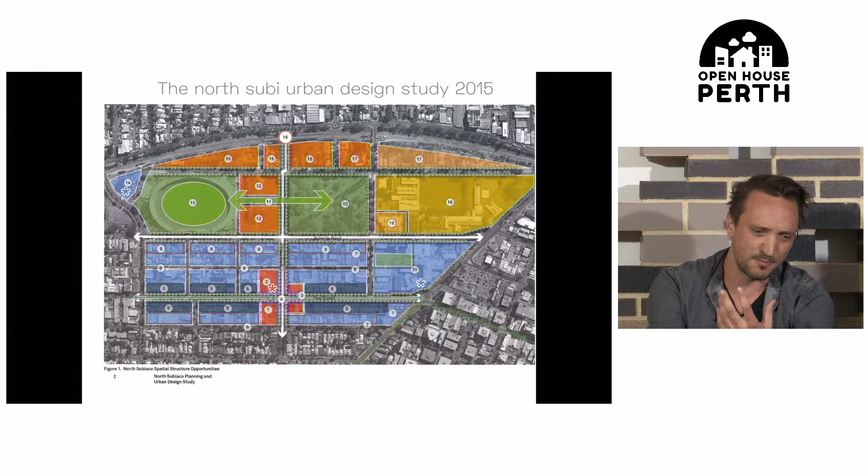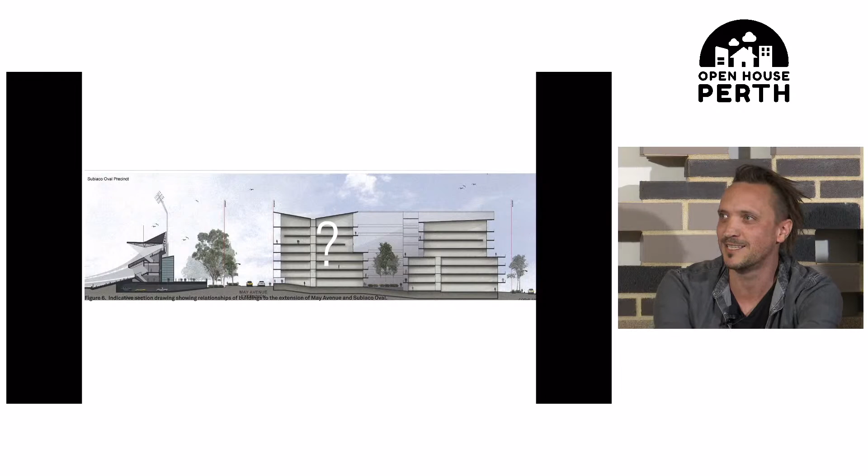At the time there'd been this North Subi urban design study done, which picked up a broader precinct, but it had some pretty scary sections in it, which didn't look that exciting - well, actually just looked really scary. When we went through all the feedback from this urban design study, there were 3 words which kept coming out, and that was sport, open space, and mixed use.

So we thought, well, let's retain a sports use, let's link and expand the open space, let's actually create a mixed use heart for the precinct. We knew that once PMH got vacated and developed, you can't just have acres and acres of multi-res. You need to actually have some sort of heart or hub to it.

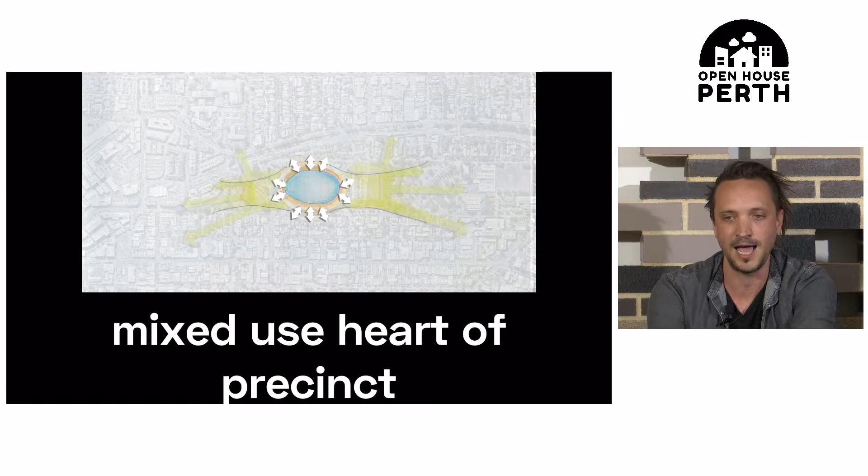And we really wanted to reinforce the transit connections between the 2 train stations, which were actually really quite close to one another. So we essentially presented to the City of Subiaco that today we have an oval, tomorrow you won't have an oval - it'll be demolished, and we want to replace it with a large water body. At about this time in the presentation, they all sort of looked somewhat bewildered and amused.

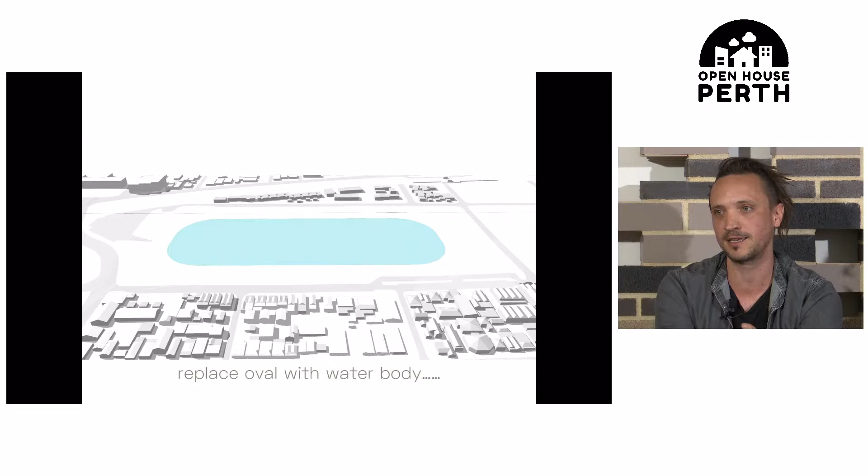But for a sense of scale, that lagoon or lake is essentially the 2 lakes of Hyde Park combined. So if you imagine this place, it's like Hyde Park, essentially - the scale of what we're talking about.

And then we wanted to sort of wrap this whole water body in parklands. But importantly, we wanted to elevate that parkland so that you actually create a hill for Subi. And we wanted to then activate the ground floor along the west, along the north, and along the south.

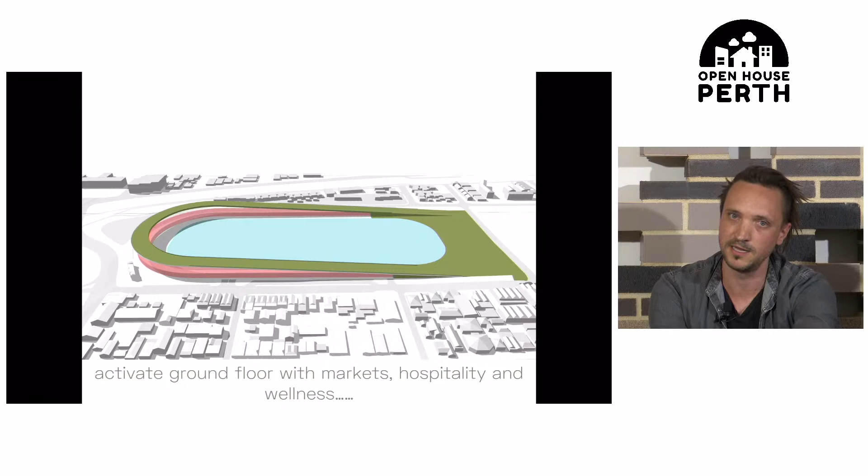Bring back markets, which would be permanent markets. We wanted to get hospitality, which could work both sides - lagoon side and street side - and introduce wellness in there as well. And then insert 220 dual aspect apartments, which would overlook the lagoon.

We would then create a link in a new public space, which would be a market square, which would help link West Leederville Station with Market Square Park in Subi and just reinforce that pedestrian link.

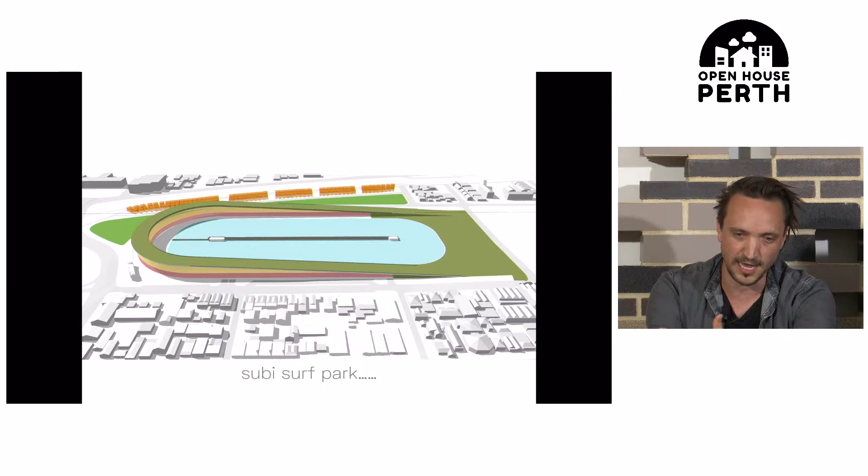And then, following the tradition of Subi and terrace housing along the railway, introduce essentially a series of attached housing along there to provide some diversity. And then you would have Subi Surf Park as a facility installed within that lagoon. So here's an image of it, 2015.

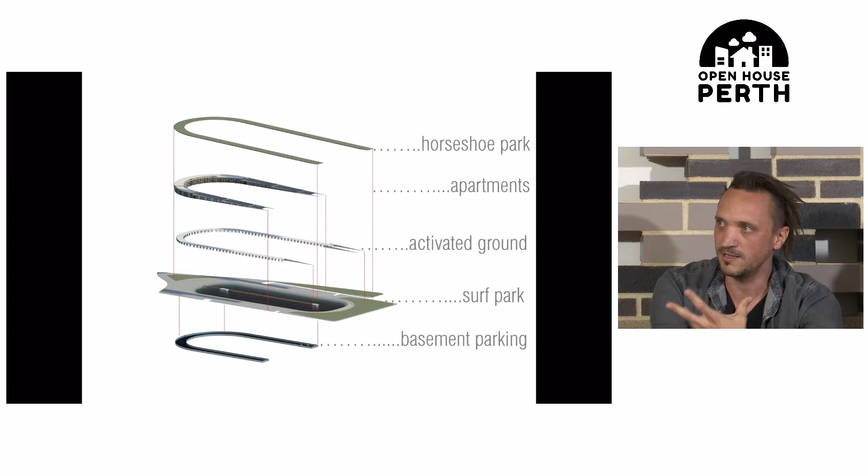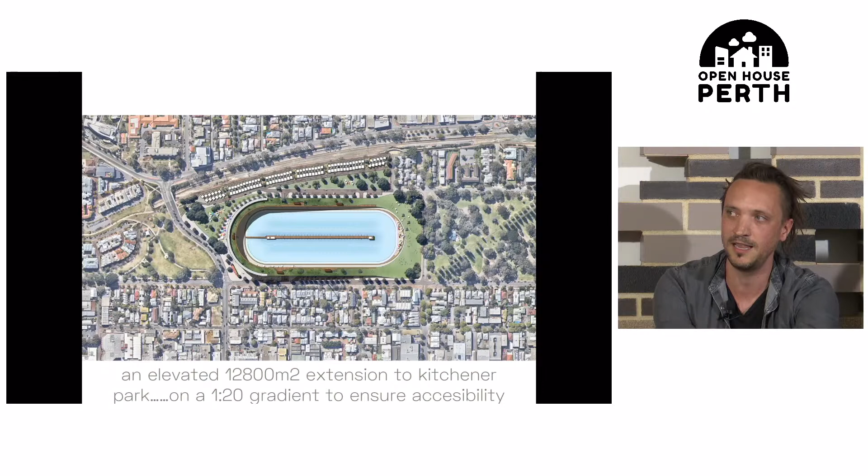So within an exploded axo, you can see the basement parking, surf park, activated grounds, apartments, and then this horseshoe park. We imagine this horseshoe park as an elevated, almost 13,000 square metre extension to Kitchener Park, for both passive and active recreation - a running track, a picnic spot, a really intriguing space that we thought we could also program with a narrative around the Hall of Fame of all the people who played at Subi.

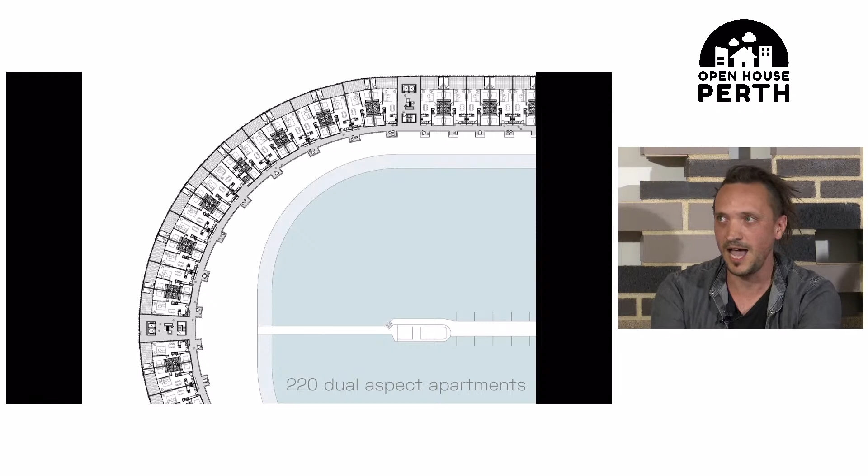The apartments themselves wrap the lagoon, being dual aspect. They had no enclosed lobbies, so they were accessed by open air platforms, and then you had balconies on both sides. On the lagoon side, the more public side, you could watch people surfing all day, and if you wanted privacy, you could flip around to the other side, where you had that batten-screened facade protecting you from the west.

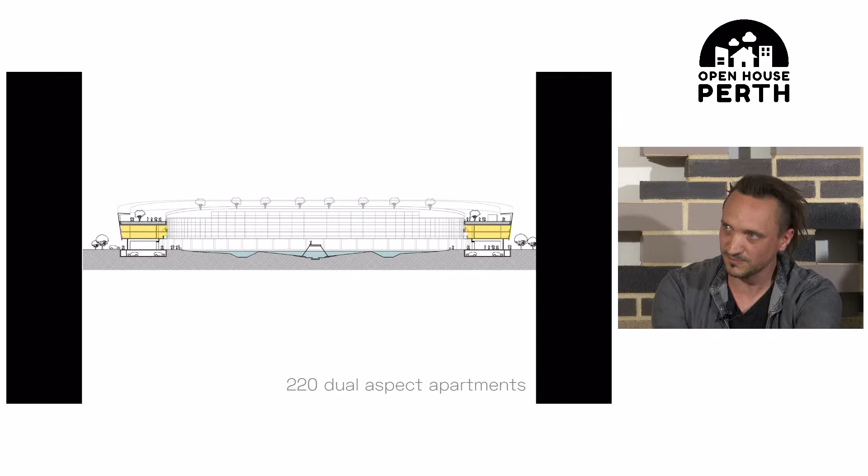In section, you can see how those apartments, in a north-south section, would overlook the lagoon, and you get a sense of what this could be like. This isn't just a flat water body - there's the noise of the ocean in terms of wave motion, but it's also dynamic, always constantly moving.

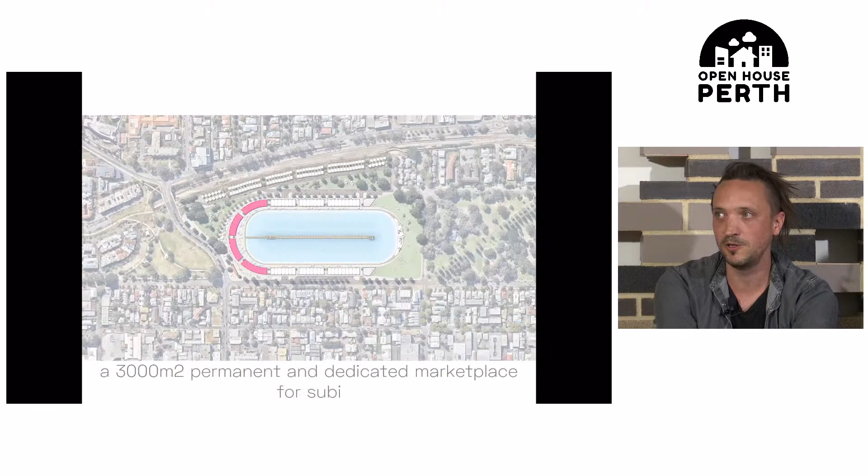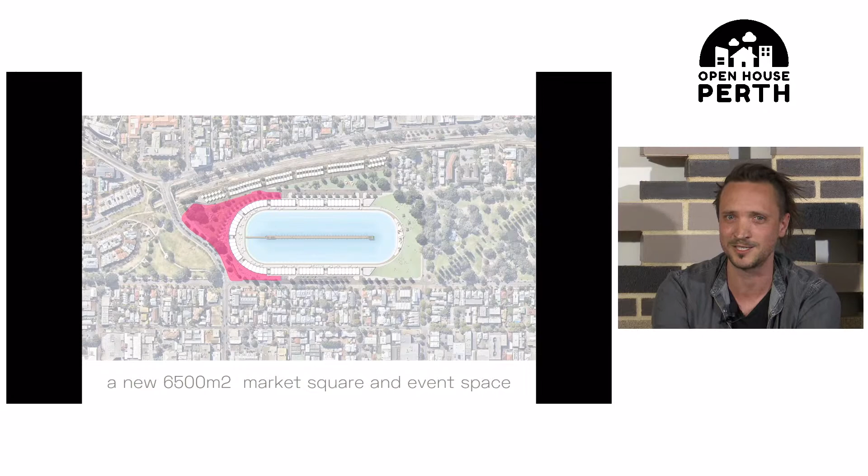We were really keen to get a market hall in there, so we allowed for 3,000 square metres, a dedicated space taking on some of the best ideas from this project by MVRDV in Rotterdam. It was going to open onto a market square, because Market Square Park in Subi has always been a peculiarly named place, so we wanted to give it a market so that you could link these two spaces and make sense of the thing.

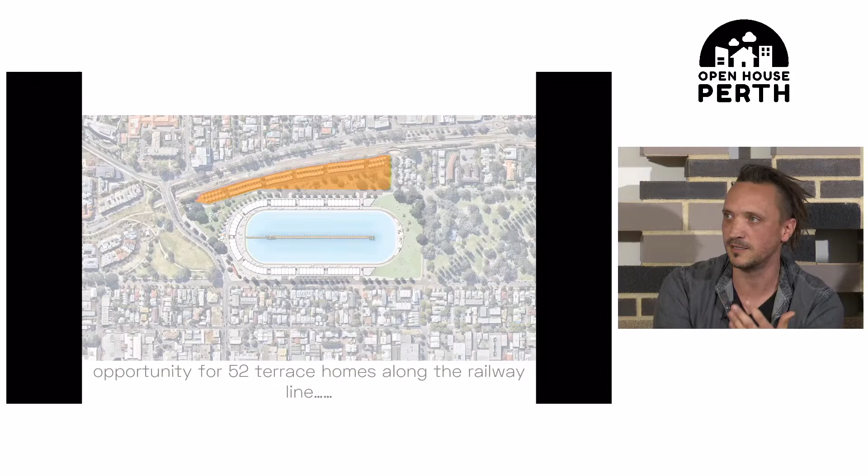And then on that northern side, you get a run of 52 terrace housing, which could provide a diversity of housing within that zone, because it's always been essentially Department of Communities land through there.

The surf park itself then gets installed. The really nice thing is that you can create all of this within a 5-storey plus roof terrace building - you don't have to have a lot of height in these sort of projects to achieve a lot, if you think about them horizontally and in a different type of way. The benefit is reducing overshadowing by 25% compared to Subi Oval itself, so there's a really good benefit to all those guys on the south.

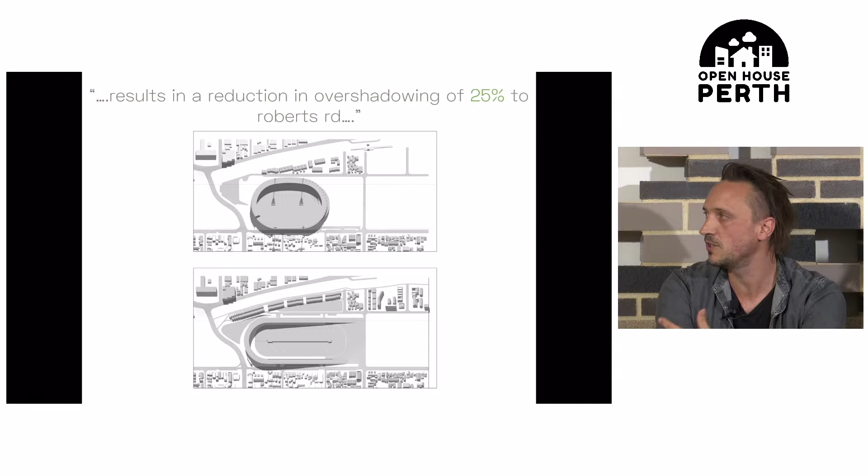In terms of power and water use, the water it was going to take every year was equivalent to how much water you use to reticulate Subi Oval. It's very much an equivalency there, and the power is equivalent to essentially a community aquatic centre. So these facilities, you've got to understand, are community assets.

So we decided to present to the City of Subi, and we had the planning team there. They listened, they smiled, and then when we went through it, they actually got it, and they thought this is really cool - how are we going to do this? We presented about how it fits in with the TPS, and we can totally do this.

And then we thought, well, this is such a good idea, let's try and get some press. And so we pushed it out there.

Unfortunately, Papa Smurf sort of outshone us on the front page, but we did manage to sneak in at the bottom. And then it all went a bit bananas. We went on the telly with our terrible haircuts, and then it got picked up by news all around the world. Huffington Post in France picked it up. Within a couple of days, we had 46,000 views on YouTube. A whole bunch of design blogs picked it up too.

It was kind of hilarious, because speculative projects you do like this because you have an interest in it, and it'll be a bit of fun, something you might not have done otherwise. Sometimes it's nice not to work with the client, just to have a bit of freedom. You have an idea over a beer, and then it's kind of funny when it blows up into something like this.

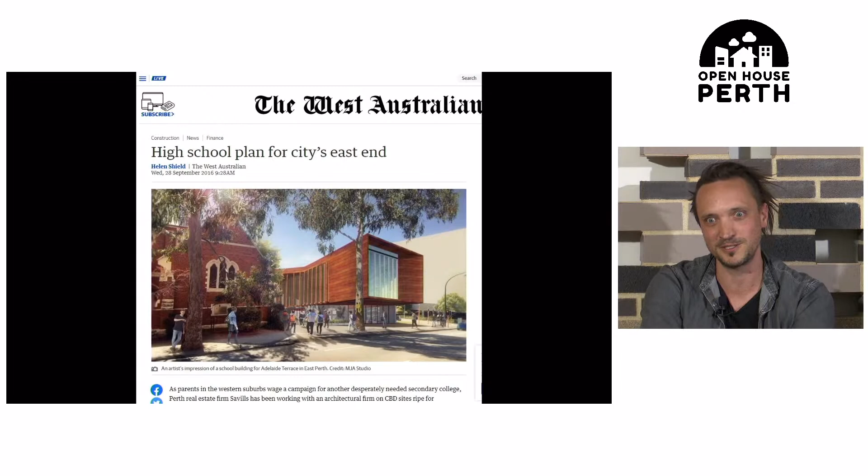We were able to retain a number of the buildings there. You could use Langley Park as your playing fields, which could finally sort of activate that space. And so we lost another one.

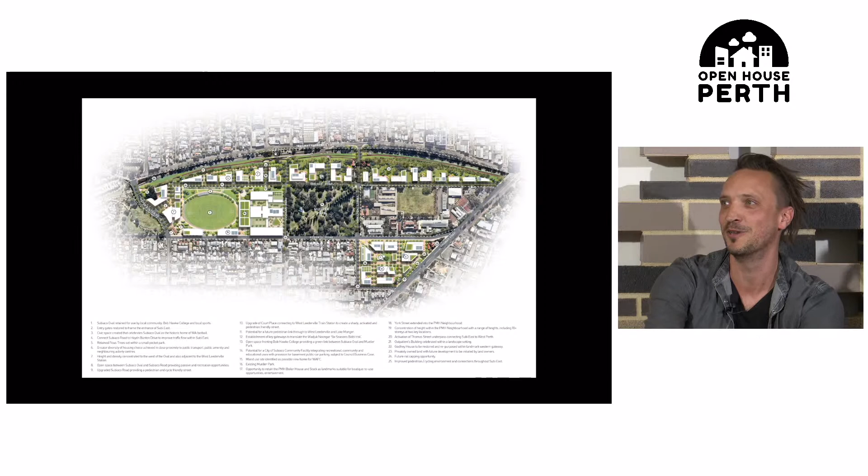City of Subi came up with their own plan, sans Wave Garden, not looking quite as exciting. But now Development WA is taking on a much broader precinct and is looking at 30-storey buildings adjacent to Subi Oval. So we never got on the cover of Lonely Planet,

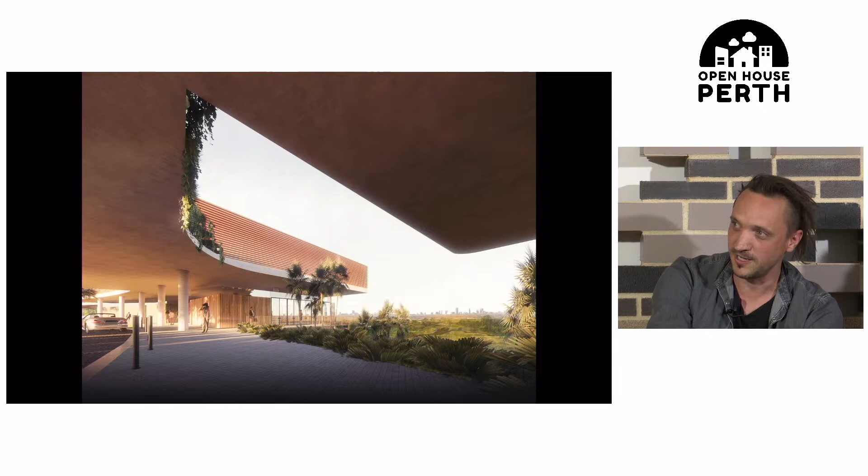which would have been a bit fun. But now we're taking these concepts further afield. We're looking at sites in Miami - an integrated mixed-use development with a golf course, hotel, putting green, function areas, hospitality, a number of different things going on over there. It's a live project and pretty fun and pretty exciting, very much channeling old school Miami.

So, wrapping all that up, the reason architects and designers do projects like this is often because we spot a gap or a need and think we might have a fun, or otherwise, answer to it. But they're really good at just getting people talking about possibilities and potential. And I think Perth's got a lot of that.

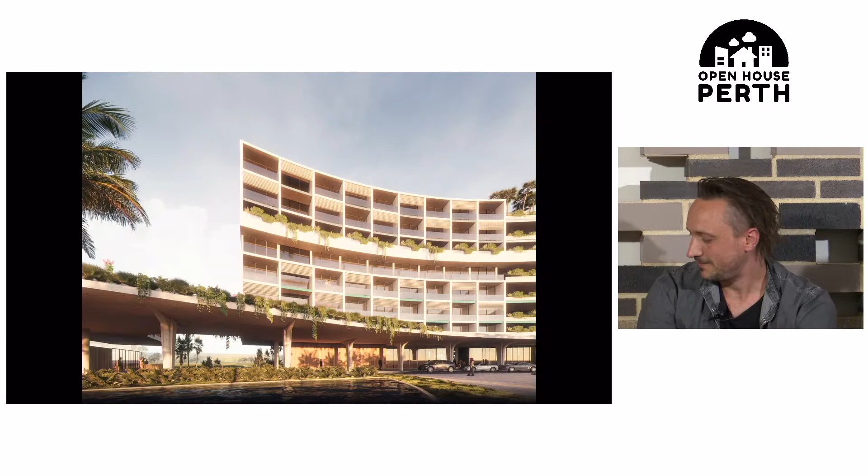Fantastic. Before maybe we move to Felipe, just one question. Obviously that takes a huge amount of collective resource and thought from your team. So at what point in time do you think - is this a 5% chance? Is it fun? Is it a 25% chance? And how do you, as a practice like yours, come together to decide whether you go through this process?

We never thought it really had a chance, but we thought it was going to be fun. At the same time, we always knew that we could make it completely believable and also possible - in terms of the planning, we could have actually done it. In terms of funders and development partners, a whole bunch of clients came to us and said they would love to do this, and we wanted to do it too. Urban Surf and Wave Garden had that portion covered, so that was 40% of the entire build. Really, if the government, Subi, and the Football Commission had got on board, it could have happened reasonably easily.

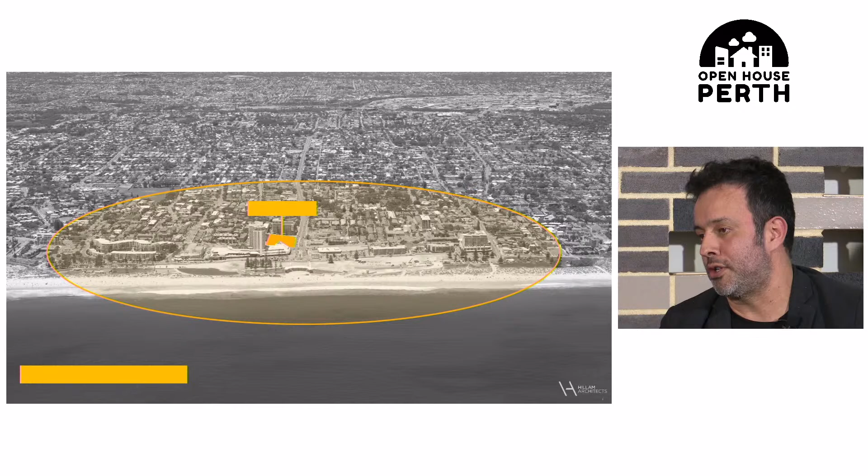Unfortunately, we always felt we were on the wrong side of the West Coast Highway for some reason. It's unfortunate, but we tried to push some of those elements as much as we can. So we started looking at South American, Miami, Ocean Drive - you enjoy the lights, the sort of flavor you find in these spaces, and we were trying to bring some of that to the building.

Again, as I mentioned, you feel like you're on the wrong side of West Coast Highway, and there was a long conversation about how we could create that connection between the beachfront and the opposite side of West Coast Highway. So we started looking at engaging with the community.

Unfortunately, this is the common element when talking about buildings in Perth - not in my backyard. Everything beyond 2 stories is called high-rise, which is an interesting statement you find every Friday in the Post. That's just become part of the routine - every Friday, go to the Post and check the 4-story high towers happening along Perth, everywhere.

So, knowing this 'not in my backyard' context, we started looking at the real context we're dealing with, in terms of people pushing for a different way to look at the planning framework, how design can actually become a community benefit, how good design becomes a key factor to change the city in a good way, in a good direction.

So we started questioning the guidelines - this is a city plan. This was Scarborough, planned by the planners from the authority. So a bunch of podiums with a bunch of towers sitting on top of each other, no imagination about what the ground floor experience might look like, and not even questioning what the skyline might look like - celebrating the beautiful hotel you've got in Rendezvous Hotel, which is a masterpiece. I'm pretty sure you guys are happy with it.

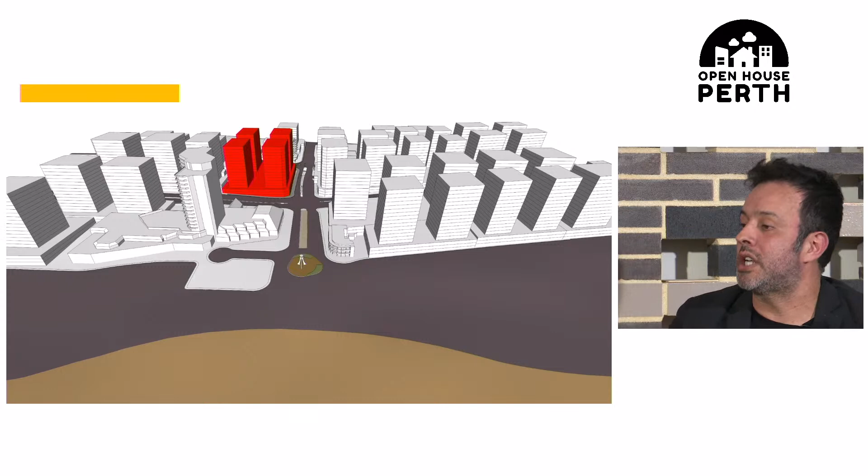But I guess just looking at the same element across multiple sites and not really questioning how we can create a place in this area. So we tend to use these sort of diagrams all the time, and we've found that these diagrams are really for dummies to understand what we're trying to do with the massing of the building. A really simple graphic way to explain what we're trying to achieve.

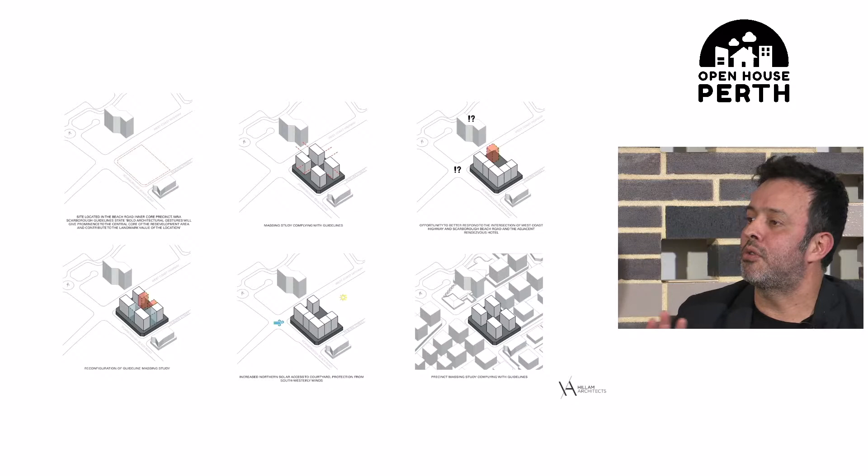So we went through a series of diagrams explaining the massing of the building, how we were trying to relocate the massing into a higher and taller structure, and the opportunities we found on the ground floor. One of the elements we were questioning from day one was the podium and tower configuration, and we were looking for a merging element that wasn't really clear in terms of what the form of the built form was going to look like.

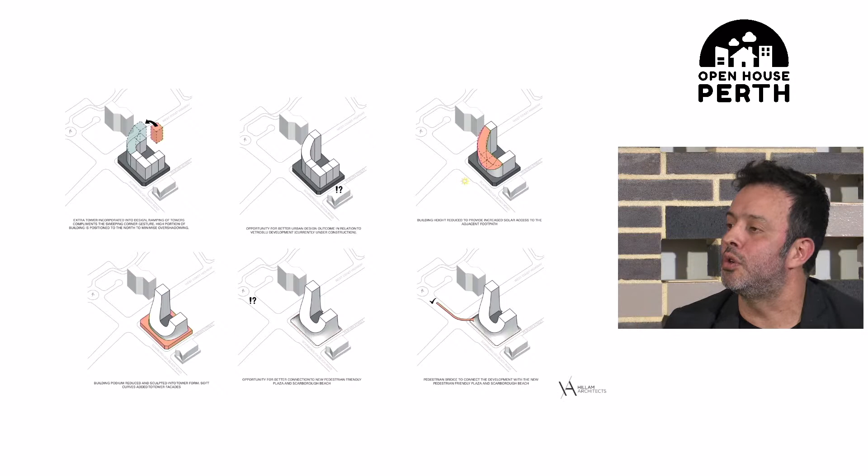So we started looking at these sort of merging elements in the way we were looking at the scheme. Then we started comparing and presenting these diagrams to the authorities. Quite a surprising response - it was really positive.

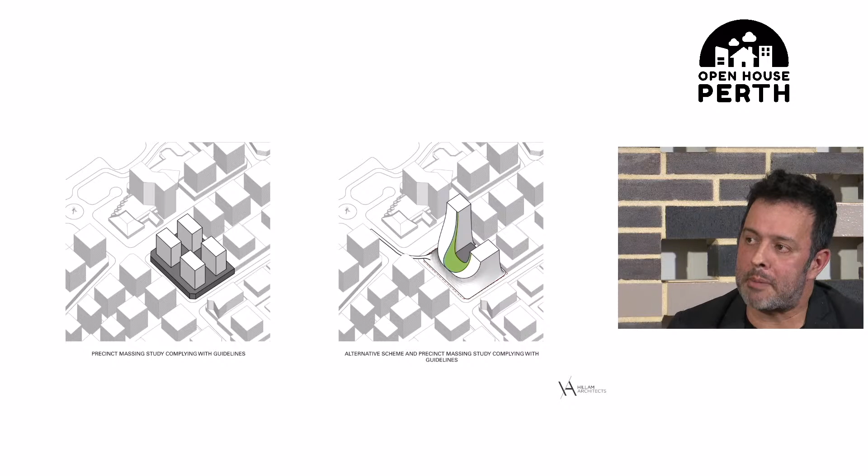And obviously, as an architect, sometimes our hand tends to be a little bit quicker than our brain. So we put a scheme out there because we felt excited about the project. It's really exciting, so we put an idea out there and said, look, this is what it looks like. Surprisingly for us, the response from all authorities was really positive in private. Everyone in private said go for it, it's a great idea, you guys are going to make it happen.

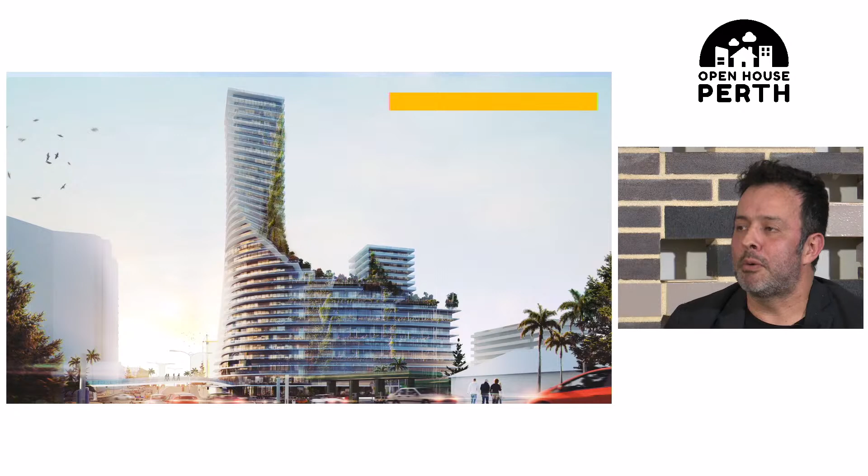But we still had a little bit of concern about what the actual response through the approval process was going to look like.

And something we found interesting is everybody went to the media and said, I have never seen the project. At that point, we had actually met everyone through the whole authority, legal, planning framework to get feedback before we went public. And everyone came out and denied the whole process - we have never seen it, nobody has talked to me, I don't know what you guys are talking about, I haven't even been informed of what's going on on that particular site along Scarborough. This was some of the responses we got on the project.

So we started looking at the pushback: no high-rise along the beach, we don't want the Gold Coast along Scarborough, and the famous Sunset No Scrapers group, which pushes back a lot on height. But I guess we've always seen an opportunity to use buildings and good design and architecture to talk to the community and try to communicate that good design is an actual community benefit.

And looking at the guidelines in a different way, perhaps there was an opportunity to identify some potentials that weren't considered before. So we checked diagrams, we checked a lot of ideas about the building. The scheme was calling for four towers and a podium, a really cookie-cutter approach. We started looking for different configurations on the tower, trying to find something that was really exciting.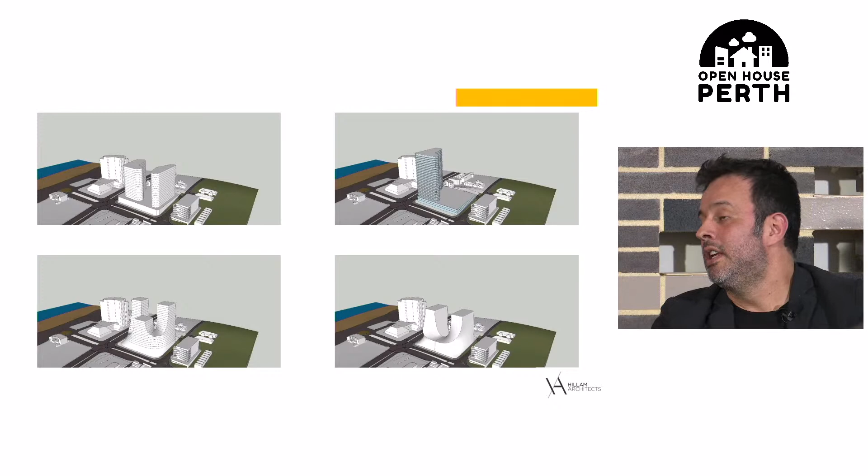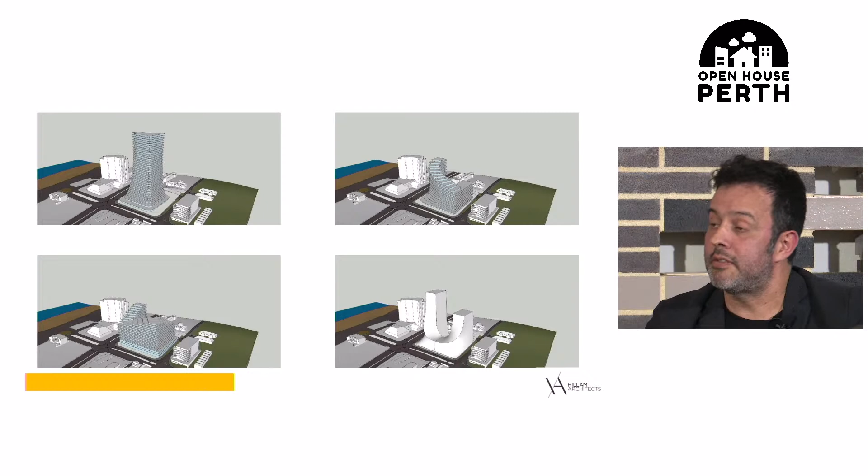Something important to mention is that the client was looking for their first project in Australia, so that was critical for them. The other priorities when looking at the project, as I mentioned before, were an iconic project that starts setting up the brand in Australia, second was talking to the community, and budget was never an issue - that was an interesting statement when we found out how important it was.

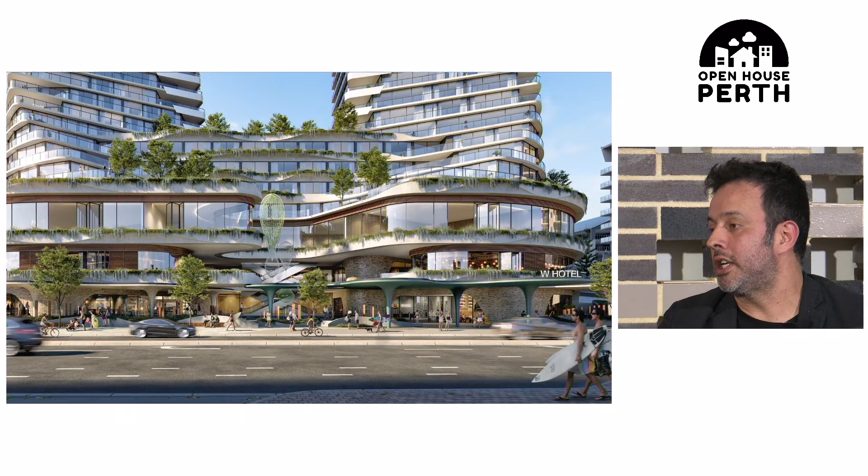And we went out to the public with this proposal, the first scheme we put out there that got a little bit more refinement. We understood what we were doing on the ground floor, the interface with the street. We saw the potential, and one of the things this scheme was trying to address is that we saw the long-term vision for Scarborough Beach Road as a main corridor to get to the beach. We were looking not at the short term, but at the future of that area as a corridor to the beachfront. So you can see we were looking for really open spaces on the ground floor, trying to integrate the public space with the existing Scarborough Road beachfront.

We started exploring a scheme, trying to bring as much as we can those early images of a vibrant and happy place to be in.

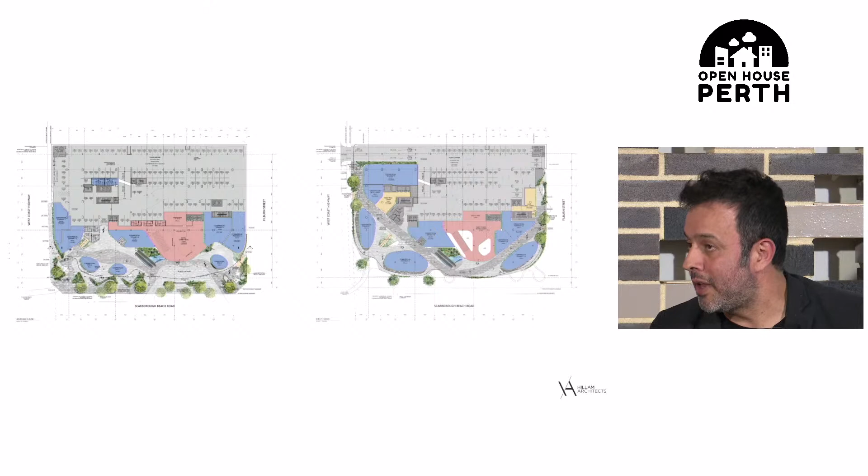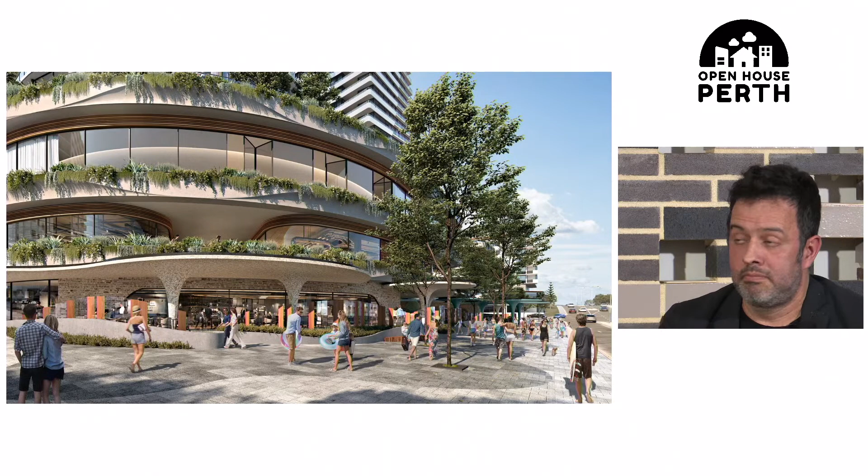And the idea just got really scrutinized in terms of, unfortunately, the numbers. Something we've found from the process in design is that people get fixated with numbers. They don't talk about design, they just talk about the number of stories, GVA, GFA, or all these numbers that perhaps don't mean anything at the end of the day.

This is an interesting request. At the time, the Avengers movie came out, and our client, a big fan of Tony Stark, probably thought he was a Tony Stark sort of Asian version. So he said, what if we explore a helipad on top of the building? And this is a text message on a Sunday afternoon from him saying, Felipe, what do you think about Tony Stark Tower? I said, okay, let me have a look.

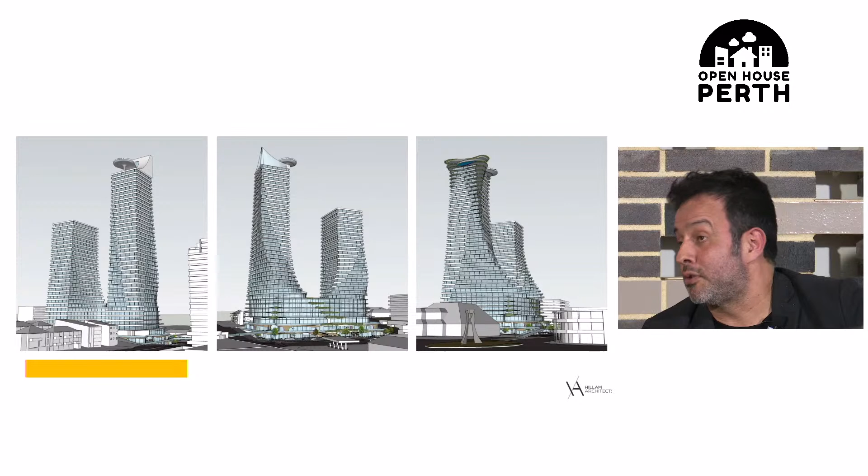But as we always do with our clients, we started testing the idea of the Tony Stark, Iron Man sort of helipad. Thank God it didn't fly. But I guess as an architect, we always tend to address the client's feedback, just listen, take a deep breath, and then look at what the option might look like.

Some of the feedback on the project was really positive. I think people in Perth are changing. They want to see something different happening along the beachfront. And I guess this was probably one of the early projects after a few years that opened that conversation: what are we doing with our beachfront? For someone who comes from overseas, as I mentioned before, I think this is just a wasted opportunity.

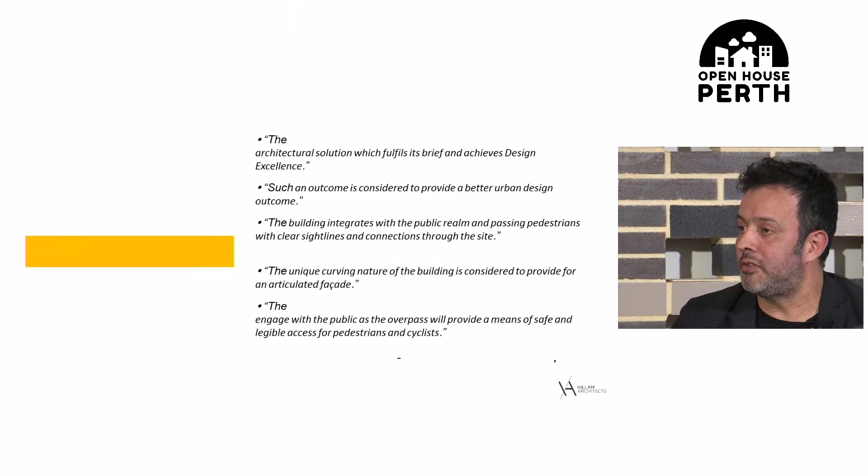I think we are trying to give our back to the beachfront, and not trying to enhance what the beachfront looks like and how we can just improve it.

The project got all over the media. It went bad. It was sort of quite well known that it got refused. It didn't fly. And at that time, we were invited, and it's not in this slide, but we were invited by the state government to sit down with them and relook at the scheme.

And in that first meeting, something interesting happened. You can imagine the developer and the client on one side with planners, lawyers, and everyone involved. It's like ready for a battle. And on the other side, the authorities, right? And one of the design review panel members stepped up and said, guys, can we just have everyone leave?

Just everyone leaves, and this is an architect's conversation. Hey, it's not a problem. Let's just find a solution just with architects in the room. And that's how we started the process of the project that actually got approved.

So we started looking at different concepts in terms of what the ground floor interface might look like, addressing the existing conditions along Scarborough Beach Road and creating this sort of shell approach for what we believe is the best way to address the pockets of public space we created on the ground floor.

And what we came up with is a tower that started picking up on those color elements and that material palette that was more familiar to people within the area and in the wider context.

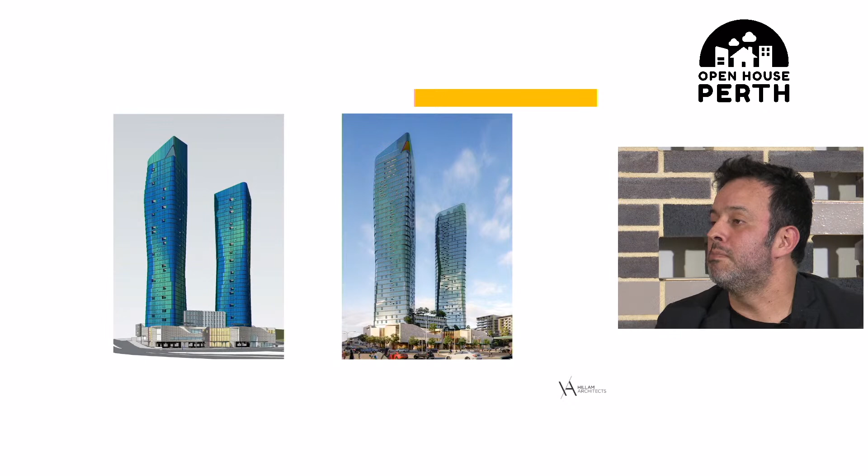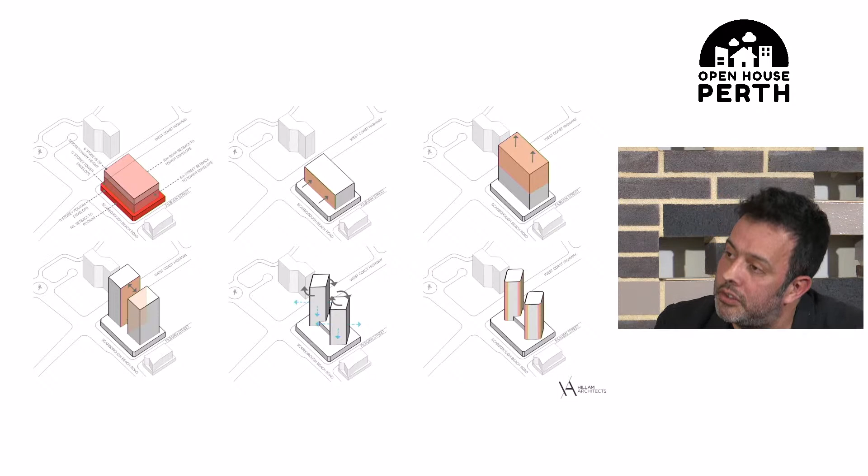Again, we go back to dummy diagrams to explain some of the principles, so it's easy for people to digest what you're trying to do when you get questions through the design process, looking at and trying to explain the reasons why we were doing what we were doing.

And something interesting is that we spent probably almost a year on the first scheme. And when we were invited by the state government to sit down again and look at the scheme, it took us less than three months to come up with the final design that got approved.

And it was just a really healthy architects' discussion about ideas and design, right? Planners are out of the question, no lawyers involved. The client wasn't even in the room. It's just a group of architects talking about design and good quality.

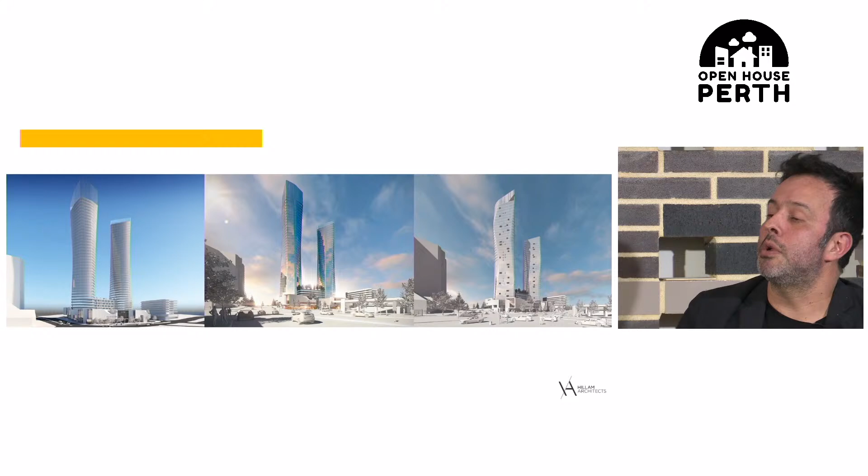And these are some of the early diagrams that we went through, looking at the scheme in a different way. It was just focused on the ground floor interface, addressing Scarborough Beach Road, and trying to come up with a scheme that just talks about Scarborough.

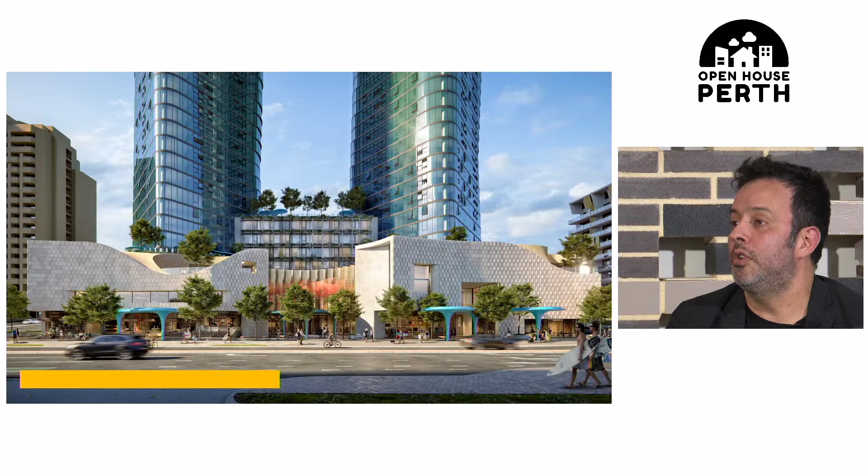So you can see in here the diagrams, some of the ideas about the ground floor, the potential of creating different opportunities within the public space to create pockets where people could just come together. I think that is something the first scheme was trying to address at a larger scale.

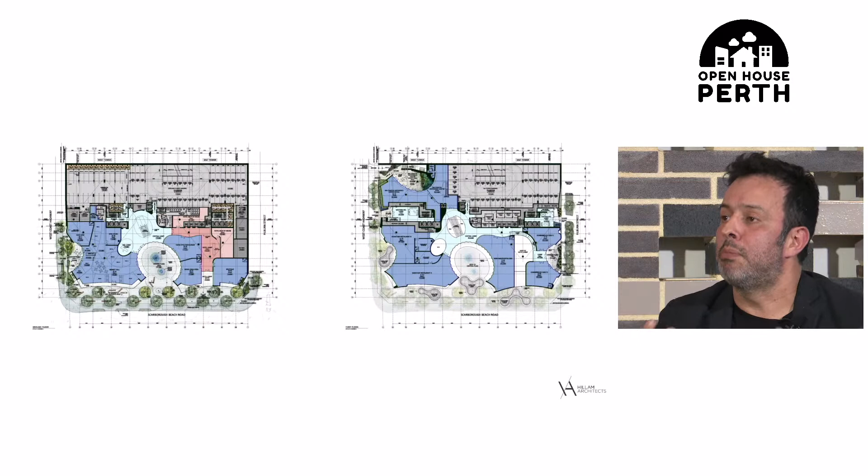I think in here we were looking at something more about pockets, smaller groups, and some of the elements we were looking at trying to create a Scarborough sort of reference, looking again at the public spaces. Probably a more balanced approach in terms of the ground floor experience.

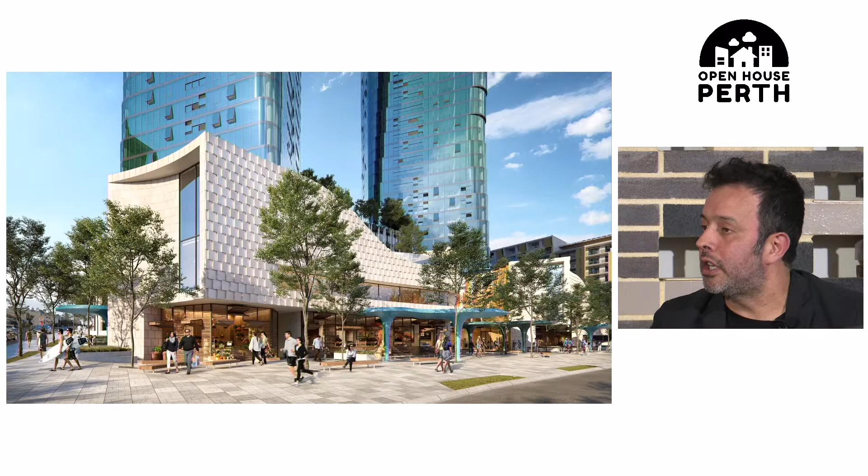So those early images of Miami and Ocean Drive perhaps needed to be pulled down a little bit, trying to find what a Scarborough might look like in terms of these upcoming developments. We were beyond what everyone was looking at.

As I mentioned before, the client, this was their first project in Australia, and the brand for them was really a key part of the conversation. So we went even to the point where we were proposing art galleries on top of the building, viewing decks, and different activities that we saw as a potential contribution, not just to Perth in general, but to WA.

I guess these sort of projects bring the opportunity to create tourism assets to the bigger picture. Unfortunately, well, it just didn't go ahead.

It got approved. Happy news. We were really happy. Big dinner with the client, planners, and the lawyers again in the room. They were the big winners that night, really happy about the whole conversation.

And unfortunately, the project didn't go ahead for different reasons. I think the client, to some extent, has misled the community in terms of the reasons why it didn't go ahead. I think the project was a really great opportunity that perhaps they missed. I think nobody is going to get 43 stories approved in a 12-story context, with all people supporting the proposal.

So we were interested just to get a little bit of feedback on the two schemes. With all the social media we have available at the moment, we went to Instagram, put up the two proposals, asked people which one they liked, the first one or the second one. It's sort of interesting to see how balanced the conversation was.

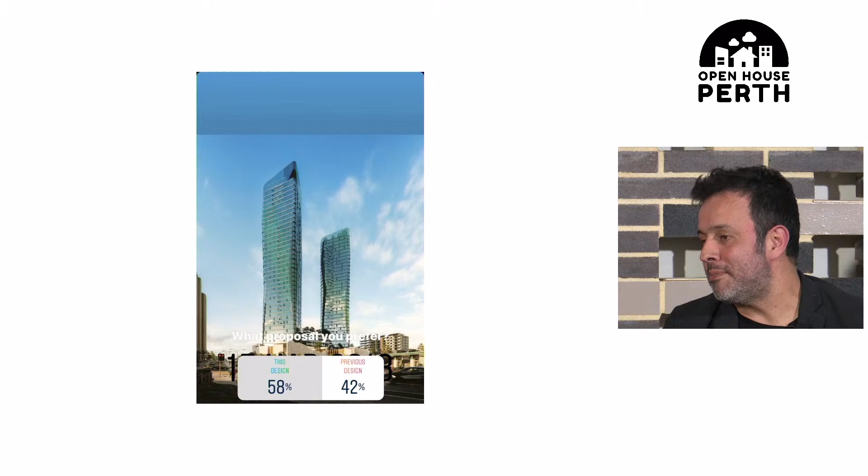I think people got a little bit more emotionally attached to the first scheme rather than the one that got approved, just perhaps because it was longer in the media, and this one was a quick response that went out to the public. But I think the response was really positive in terms of the scheme.

Something that I just squeezed into a little project here. This is something we as a practice are really interested in, and it's affordability. We believe that as architects we have a bigger commitment to the community in terms of addressing some of the bigger issues that are actually happening, that are real.

I think we take some of the experiences of working with developers across Perth, and we try to pick up those little pieces of knowledge and see how we can bring elements together to start addressing some of the elements in terms of feasibility.

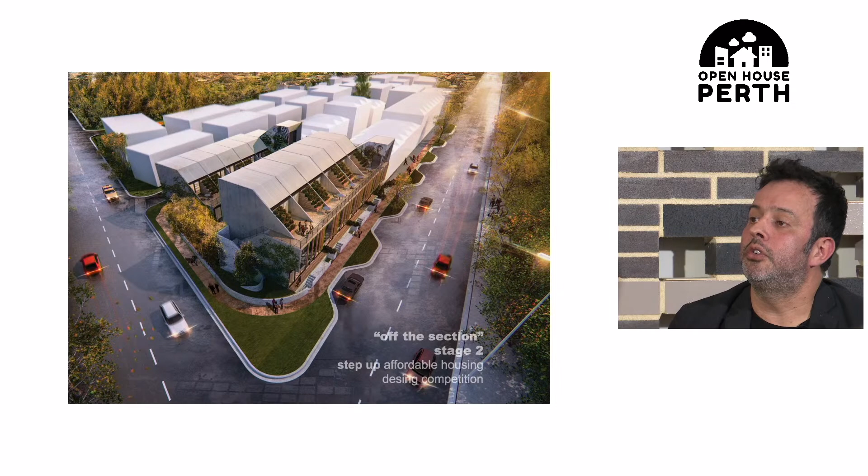I want to skip a couple of these images, but the principle of the idea is, we were South American born, so I am quite familiar with some of these examples. Affordability is a big issue there. So just looking at some of the examples of Alejandro Aravena and Elemental Chile, looking at how we can make living and residential elements as affordable as possible.

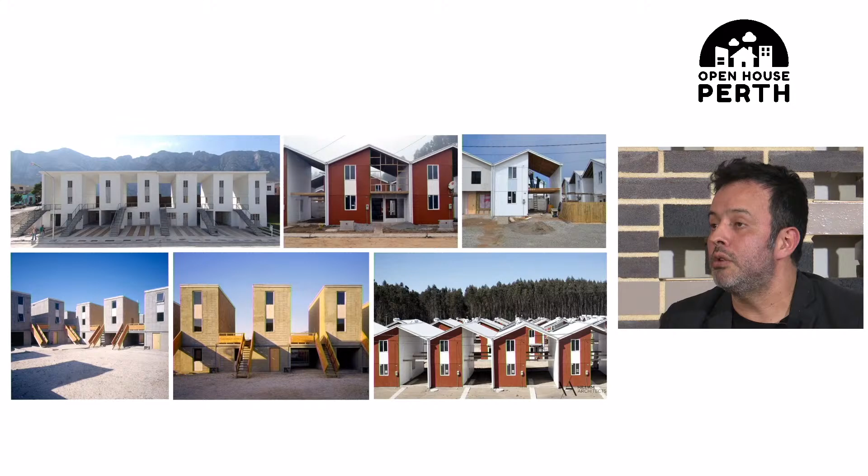So we brought some of these principles in, and what they talk about is what we keep looking at: residential living in terms of square meters, then we start looking at cubic meters and the potential of people just growing with an existing shell. So we brought some of those principles to these buildings. We came really close to winning.

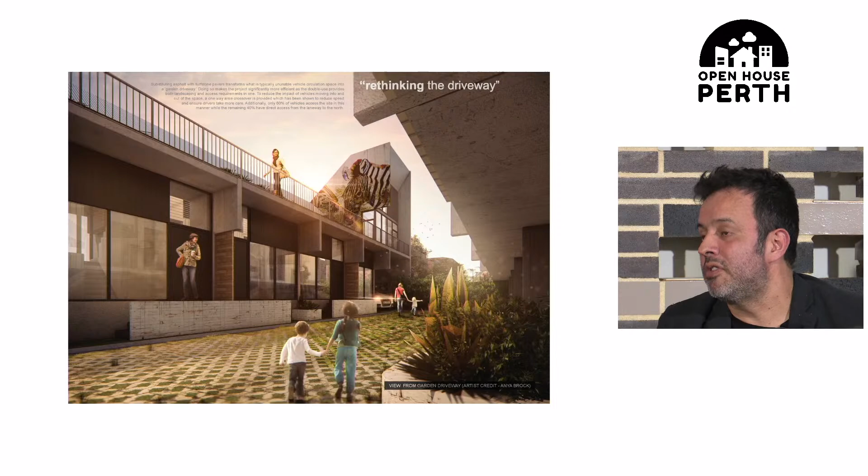We didn't win, but it's all about creating a community within the project - a series of townhouses with a driveway in the middle, nothing really atypical, but the potential of creating these sort of spaces and creating community within the provision of basic spaces that we need to provide anyway. So as a practice, we're quite interested in exploring those sort of solutions. I think we've got a commitment to go beyond what a normal developer or client would be asking for, and to just deliver even more.

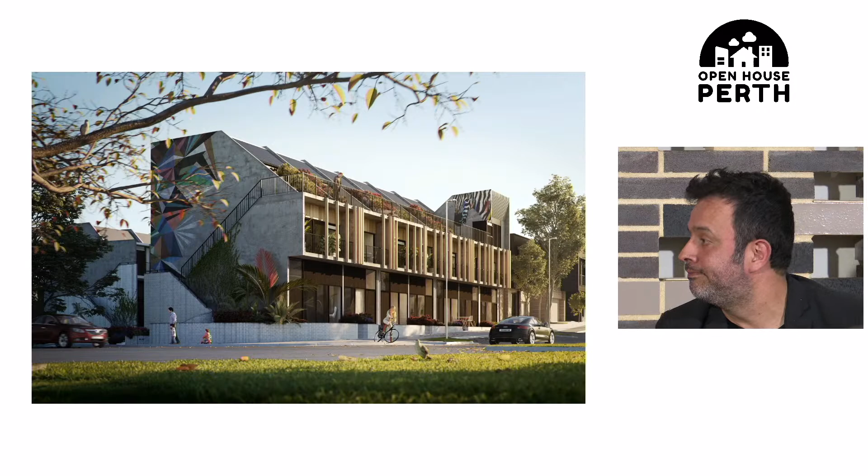Thank you. Thank you, Felipe.

Maybe a quick question for you, Felipe, and then probably Jimmy, it's very relevant for you as well. If we look at the maturity of Perth and how it's starting to evolve, the sprawling nature of it, and compare it to say a Spain or a Paris, which has this 5, 6, 7 level of thickness that still allows a high level of density, as opposed to Singapore and Manhattan, it feels like from a community perspective, over here they don't want either. So at the City of Nedlands, the community has said no, no, no for 10 to 15 years, the Department of Planning comes in and approves a dramatic increase in height, so they end up getting exactly the opposite of what they wanted. But if they had a level of collaboration, they could have come to a happy medium. So how do you see this city trying to break through these challenges from a local community perspective with medium density to height? Because at the moment it's either one or the other.

Yeah, I guess one of the biggest challenges we're facing at the moment is fear of change. Nedlands is a great example of what is really happening. I think it's an educating process that the community needs to go through, and I think the community needs to be educated on a couple of things. The first is that design is the key element to finding the solution to any outcome that they want. Unfortunately, the fixation on what the number looks like is probably what's delaying that conversation.